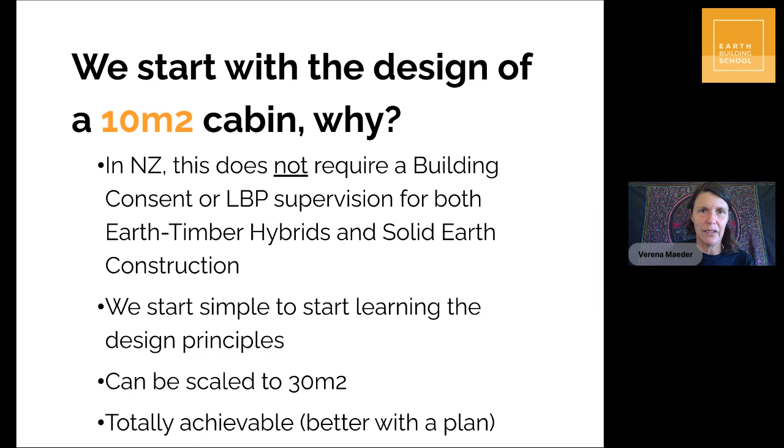So in terms of designing, definitely start small, try and keep up this week. You'll see there is a lot of moving parts even with a very small building, and then we can talk about what has to happen for you to either go into making this building a reality, like actually building it, or scaling the design into something bigger.

So just a couple of words still on the legal side of things - wherever you are, you need to make this investigation.

What requires a building consent or what is exempt. Exempt means it doesn't require a building consent. You decide what the situation is for you, and every region, every country will have different regulations. In New Zealand, we have this exempt building work.

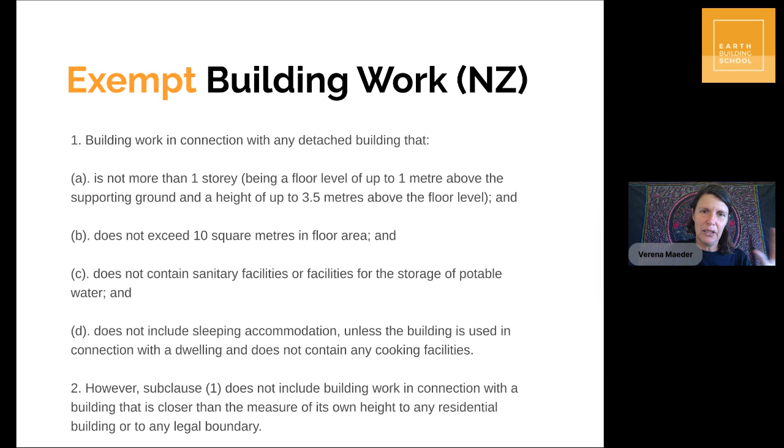You can Google that and read up on it. I'm just putting the wording on screen, I'm not going to go through it. There's actually a new publication that's just come out about tiny houses in particular, and I'll put a link to that in the comments to the live stream after we finish. So that's just come out, or I've just been made aware of it a couple of days ago. This is the legal side of things, what is exempt, what requires a building consent, and that will allow you to make an informed decision.

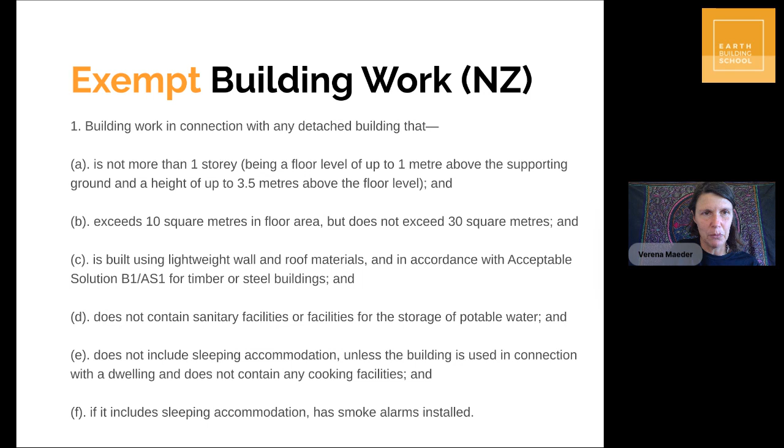I'm not going to tell you what you need to do, because that's up to you. At the moment we're just talking about design, and as I said, it's important that you design to standards. Since we're looking at earthen tiny houses, I'd like to introduce you to the New Zealand Earth Building Standards. It's a set of 3 standards, and 2 are relevant for self-builders. For the design challenge, we're looking at the top one: NZS 4299, Earth Buildings Not Requiring Specific Engineering Design.

These standards are designed to support owner-builders, self-builders, in designing full homes, but we'll apply the principles of this to a tiny house. The standards have been around since 1998 and have recently been revised. The older version is free for download, which is really great. So wherever you are, but also if you're overseas, I'd really encourage you to download this and have a look at it, because it's very common sense and very practical. It really, step by step, lays out all the things you need to go through to design an earthen building.

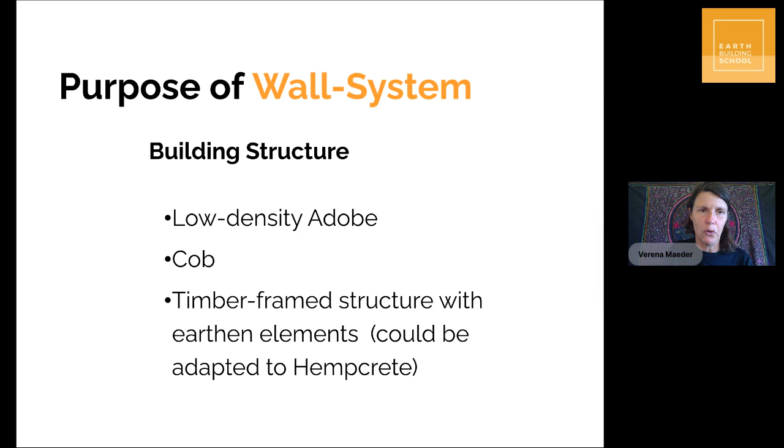For the solid earth walls, based on taking the temperature in the group - when you're joining the Earth Building School Facebook group at the start, you're telling me your interest - and based on those answers, there's a lot of interest in Cob. So I will be presenting on Cob, and I will also be presenting on the Adobe brick technique, particularly the low density Adobe brick, which is an innovation here in New Zealand that we've been involved in since 2008. So I really want to present that option to you.

Just to give you a bigger overview, when we're talking about earthen buildings, there are so many different techniques worldwide - so many historic earth building traditions, and according to different places, the climatic conditions, the craftsmanship, the resources, different techniques have developed. We can roughly divide them into 3 sections: monolithic solid earth walls, meaning in one piece; brickwork, where you have smaller units put together with mortar; or structures that are a supported earth, supported by a structure.

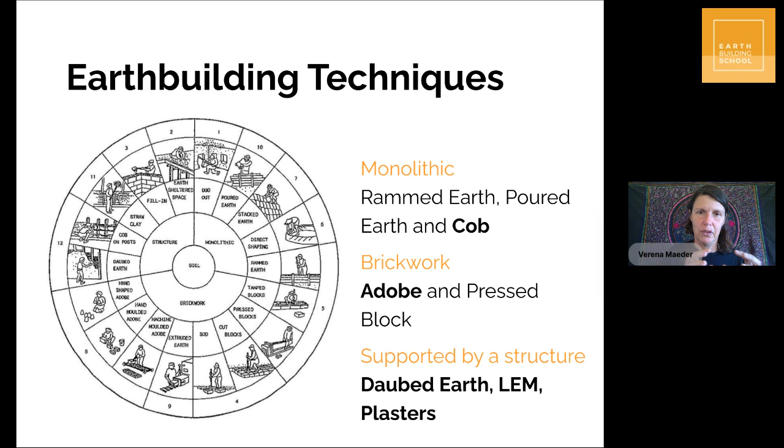Mostly this structure would be timber, or in some places bamboo. For the sake of this training, for the monolithic walls I have picked Cob. For the brickwork I have picked Adobe. And for the timber earth hybrids, where you have a support structure made mainly out of timber, we're going to touch on all of the options, because there are different ways that you can incorporate earthen mixes into timber buildings.

So today, fundamentally, you're going to choose: do I want to do a solid earth wall construction design, or do I want to design a timber earth hybrid? There are different things you can think about when making this choice. Sometimes people lean towards a technique for whatever reason, but when someone comes to me and asks which technique they should choose, the first question I ask is: where do you live? What is your local climate? What are your thermal performance requirements for your building?

That's important in terms of comfort. When we're looking at thermal performance of earthen buildings - or any building for that matter - there's always this balancing of thermal mass on one hand and insulation on the other hand. This is actually something I'm still surprised how many people don't really understand the difference between thermal mass and insulation. It's getting more clear to many people, but I just want to explain it.

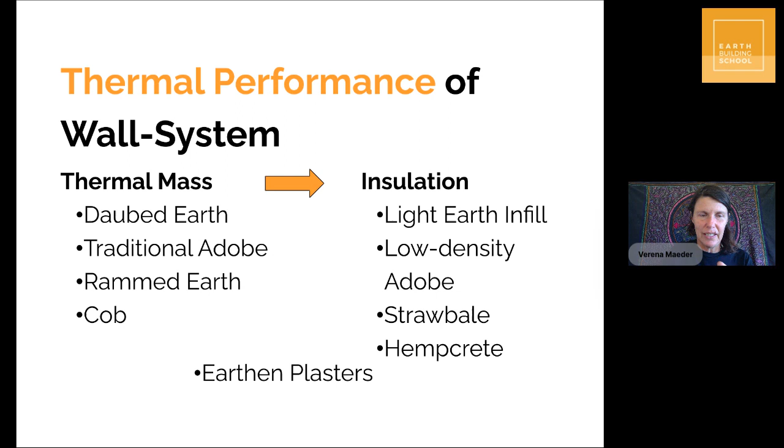So just putting this here for you to start thinking, depending on your location, what do you need? And ideally, you have a combination of both, especially in temperate climates.

So you have thermal gain, sunshine. Ideally, you design the building according to passive solar principles so that you can shade out high standing summer sun, but let in lower sun angles in winter. The solar gain heats up the thermal mass, the earthen floor or your earthen wall, and then at night that gently radiates back into your room.

And then you see the orange thing, that is the insulation that goes all the way around the entire building. So it's definitely important to have insulation in your roof. You might want to additionally insulate the cold side of the building, or have a structure with insulation in the form of lighter mixes or insulation material, and that just wraps the whole building and keeps the heat in. So you see how these two components, the thermal mass and the insulation, work hand in hand.

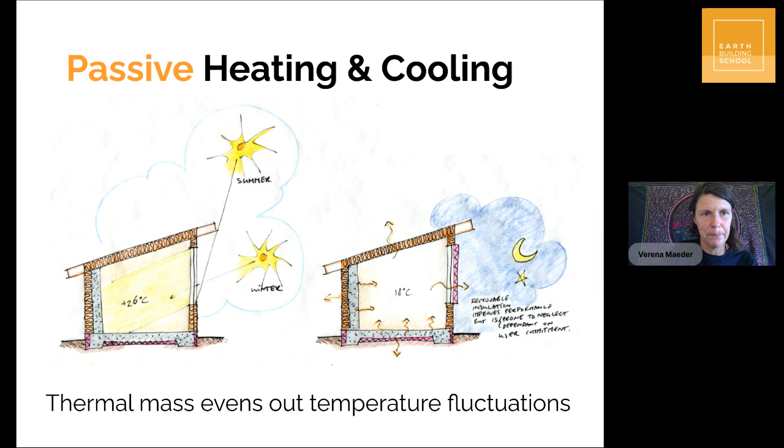So moving on, another lens through which you could make this decision is if you're actually going to build the building, not just doing this as a design exercise. I would really encourage you to think along the lines of your human resources and how the construction will happen for you.

Just give me a moment, I need to have a little cough.

So the different techniques definitely have different requirements in terms of skill. On one end of the spectrum, you have the Adobe brick and Cob techniques, which are very simple to learn. You can even learn this online—we teach this online, and it's quite remarkable how we can upskill people even over distance. You can attend a workshop, or get upskilled relatively easily, and these techniques also lend themselves to community efforts. Often there are working bees or longer workshops where people come together and actually build a whole small building, and that is very possible with simple techniques like Adobe and Cob.

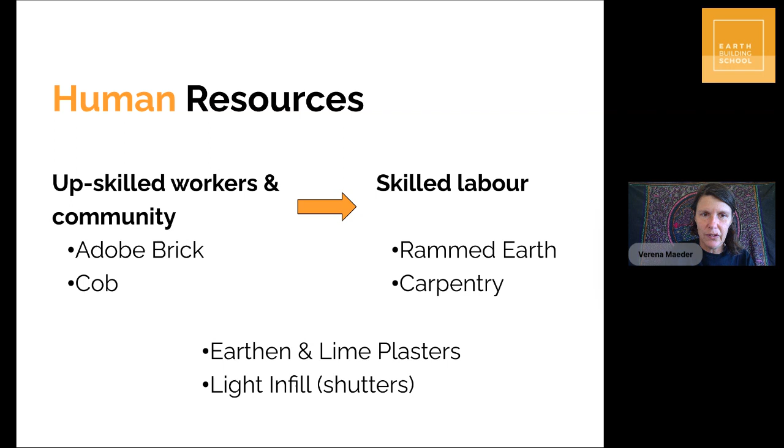Working with timber is absolutely wonderful, but you need more tools, and you definitely need to have or develop the skills. In between, along the spectrum, there's other things that flow into your building, like wall finishes, where you'll need a bit more skill than just placing cob. Plastering typically falls into that. If you decide to build a timber earth hybrid, you have the timber structure, and then you have shutters and so forth, so there's definitely a little bit more skilled work involved.

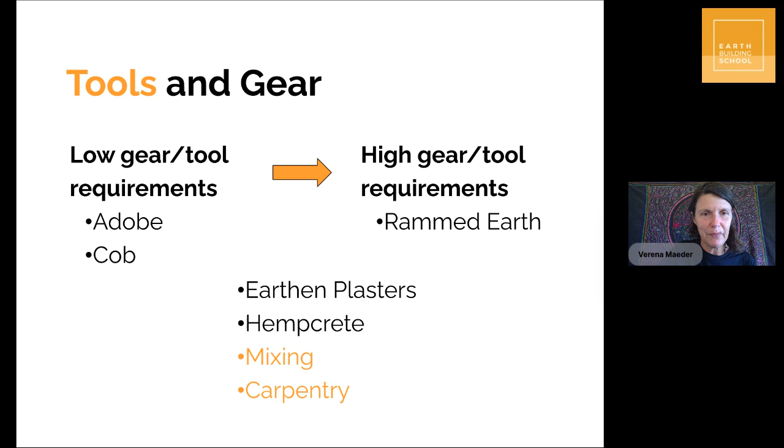Just tagging on to that is also the gear and tool requirements. Adobe and cob often can be done with hand tools, you don't need that many tools for that. At the higher end is like rammed earth - again, you need pneumatic rammers, and you're using tools to put the very heavy shuttering together. Along that spectrum, depending on what you're doing, you might require things like mixers, some carpentry tools, some plastering tools, and so forth. So depending on how much you want to invest in tools and gear, if you're going to build this building you're designing, this is something you have to think about.

Another way of looking at the choice between techniques is understanding how much moisture you're introducing into a building when you're building. In earth building, there's wet techniques and dry techniques. By wet techniques, I mean you're making an earthen mix - it can be different techniques, so you can have cob, or a light earth infill, even earthen plasters. You're making a mix that contains quite a lot of water, and you're placing it straight into your building, and then you have to wait for that water to evaporate and for the mix to dry out.

That's wet techniques. On the other hand, you have the dry techniques, where you basically produce an earth building material away from the building. It dries out, and then you're placing it into the building dry, or with minimal water. There's a little bit of moisture in the mortar, and in rammed earth there's a little bit of moisture, but overall you're not introducing that much water into your building, so the whole thing dries out much faster.

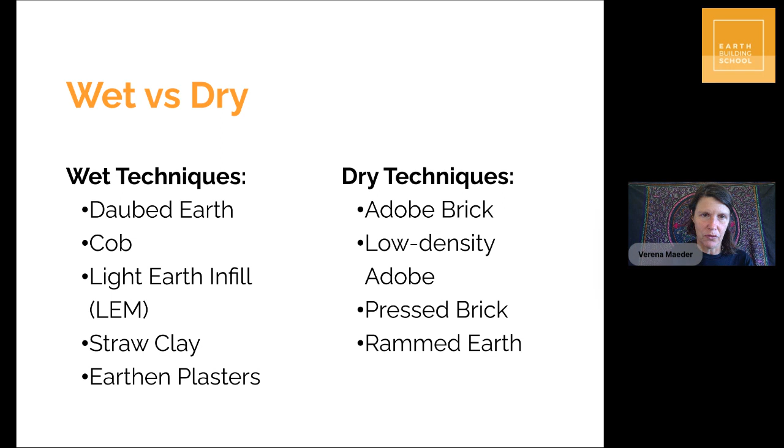And that affects the logistics of how your building project flows, how soon you can move in, and so forth. It affects, depending on the technique you choose, the drying times of your building. So when you're looking at things like Adobe blocks,

Hempcrete, daub, and so forth, even things like straw bales - straw bales are installed dry, but then they're plastered, so there's a little bit of drying time in the plaster. These techniques typically don't take that long to dry out, so up to 2 months. If you're going into wet techniques like cob or light earth infill in your timber earth hybrids, you're looking at much longer drying times - it can be upwards from 2 months all the way up to 5 months for cob, depending on the wall's thickness.

So you need to take this into consideration when you think about the logistics of the building, and when you start building, that you're not building a building that has to dry out over 5 months in autumn. The timing really affects things, so ideally you want the building to be drying out in summer. It's important to allow the building to dry out in a timely fashion, because otherwise you might have issues such as mold formation, or it's just not so nice to be in a damp building, and you certainly shouldn't move in before it's dried out. You can't do the wall finishing before it's dried out, and so forth.

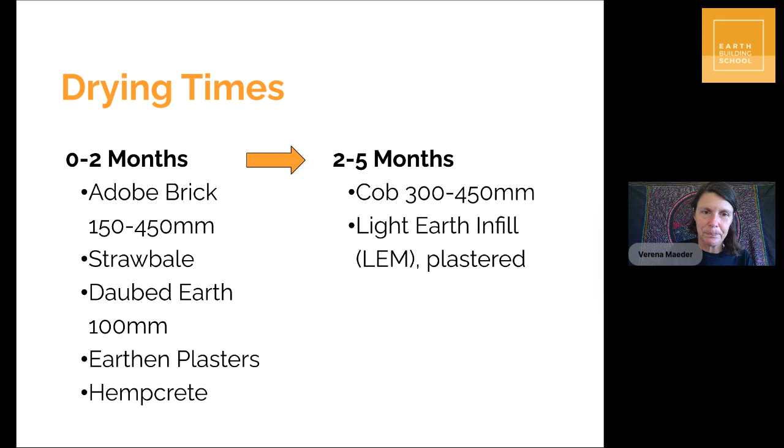So that's the drying times. And then you could think about other cost considerations, the owner, if this is something that's important to you. And when we advertised the tiny home challenge, we were definitely talking about affordable buildings and owner builder contribution to that. We're very passionate about empowering people to be able to do this.

The owner builder effort can reduce the cost of the building considerably, but depending on the size of the building, your wall system is not the thing that costs the most. So for tiny homes, it definitely makes a big difference if you build yourself, and depending on the materials you use, if you can source secondhand materials, or mill some of your own timber and so forth, that will all reduce costs.

For bigger buildings, you have to do a proper cost analysis of everything, because we found that the type of wall system you choose, you can't say this wall system is cheaper than this wall system. It really depends on a few different factors.

So on day 5, we have dedicated the whole training towards quantity surveying and cost analysis, because it's important, and it might steer you away from a certain technique that you might have wanted to choose because you like the sound of it, and then when you're crunching the numbers, you might not want to go down that path. So it's good to compare different types of wall systems, do the math on it, and think about your resources, both money-wise, people, materials, and so forth. You might want to go through this design process with both wall systems.

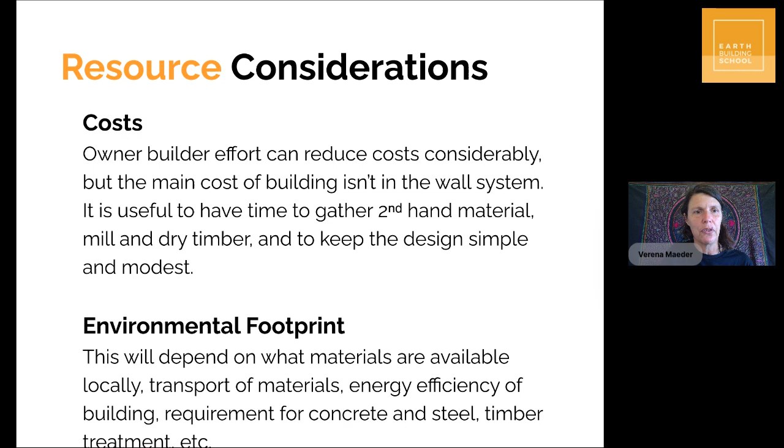And last but not least, the environmental footprint of the building does matter, especially in this day and age. So I really encourage you to see what is locally available, to reduce transport of materials, to really look at embodied energies. Sometimes there is requirement for steel and concrete and foundations, depending on where you are. Look at that and weigh it up with other materials. Look at things like timber treatments, and try to choose materials that are non-toxic, both for your own health and for the health of the environment. So these are all things you could take into consideration.

And I'm just going to leave this, a couple of words about costs. So the timber, and this is statistics based on New Zealand, our own government has put these figures out, the timber has gone up considerably in cost. So unless you can source local timber and get it milled locally, which is beautiful, you might really want to look at the costs and how these have increased.

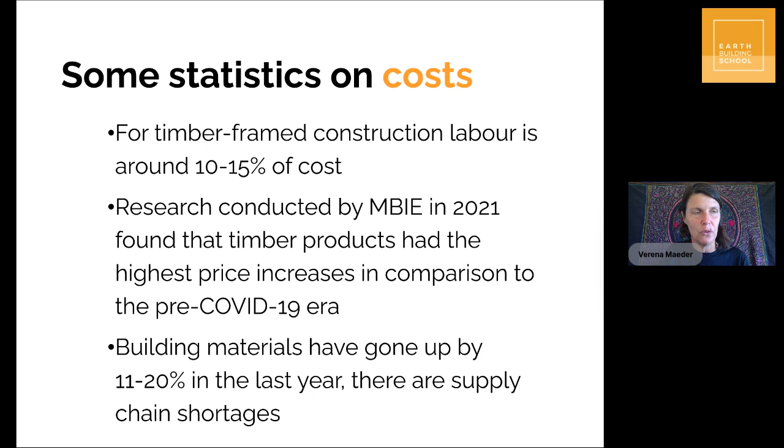If you're leaning towards a timber earth structure, it's not just for the structure, it's also for the cladding and all those things, so it can add up. The costs have gone up, but there's also a bit of a supply chain problem sometimes, so it's hard to get hold of the timber and it can hold you up. In times like these, I think the earthen materials and solid earth wall systems could really shine and make you independent of that timber supply chain, unless you have a local supply, which many people, especially if you have time to look around, that's a beautiful thing, to look for local timber.

So now I'm just going to talk you through the different techniques, starting with the solid earth wall and the Adobe brick technique. I'm mainly talking about low density Adobe, which is a lighter mud brick, still able to support the weight of the roof, but this can be adjusted to any type of Adobe brick.

If you're in a hot and dry climate, you would definitely still use a traditional Adobe brick. If you're in a temperate climate, you would go to a low density Adobe brick. It is load bearing, it's strong, and you can modify how much insulation and thermal mass the brick has depending on the mix. You can use a very wide range of soils if you're making your own bricks, so it's suitable for lots of different places and soil types. It's very easy to learn, covered by the New Zealand Earth Building Standards, and it's a very simple technique.

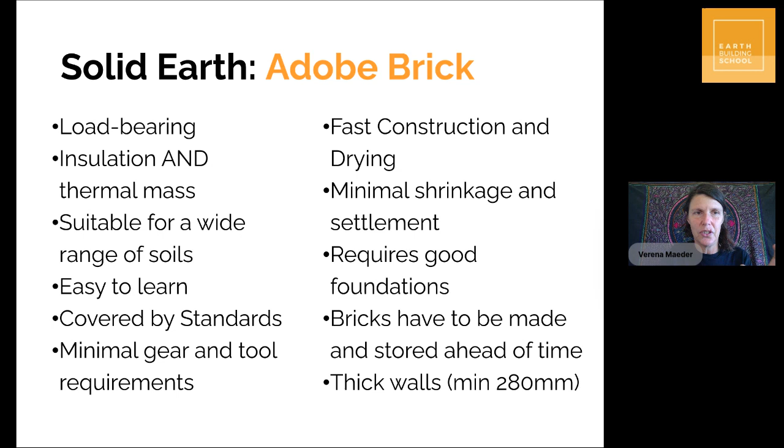The timeline for Adobe - the logistics of that is you're making a mix, making bricks, the bricks dry out, you stack them away. At the same time, you can do your design. Then when you're ready to build, it's fast - you're laying the bricks and they dry out fast, and the finish can be done later on. You're laying up your walls, and then very soon after you're putting up the roof. So it's very fast and efficient.

For a small building, the whole process can be done over the warm season. For a bigger building, it would typically be split up over 2 seasons, 2 warm seasons.

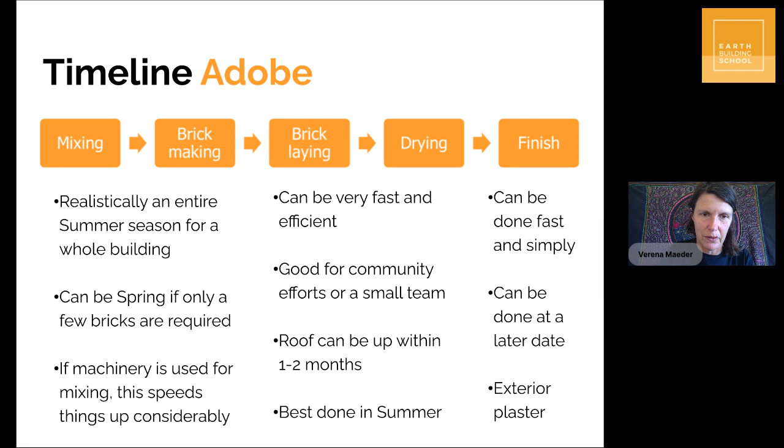Comparing this to Cob - that's also a solid earth wall, the same thickness, minimum 280 millimeter thick walls. It also requires good foundations because it's definitely heavier than the mud brick. Also load bearing - sometimes people put up a post and beam structure and put the roof up first, then cob around the post so they can work undercover, because the working times are longer. With the mud brick, you can theoretically have a good window of weather, 2 weeks, lay the walls, put up the roof. With cob, you're looking at months.

So some people choose a post and beam structure. Also, a wide range of soils is useful. What you're doing is making a cob mix - introducing straw and sometimes aggregates like coarse sand or crushed rock. Making the mixes is a bit more labor intensive, and you're also often having to add slightly more expensive components depending on what you have available locally. It's easy to learn, and it's also covered by the standard.

Because it's installed wet into the building, you need to allow for shrinkage and settlement. That's something you think about in the design, and also when developing the mixes - you have to control shrinkage with the right mixing, test for shrinkage, and let everything shrink and do its thing before you put, for example, windows in, because if the wall shrinks down onto the window, it might not be so good.

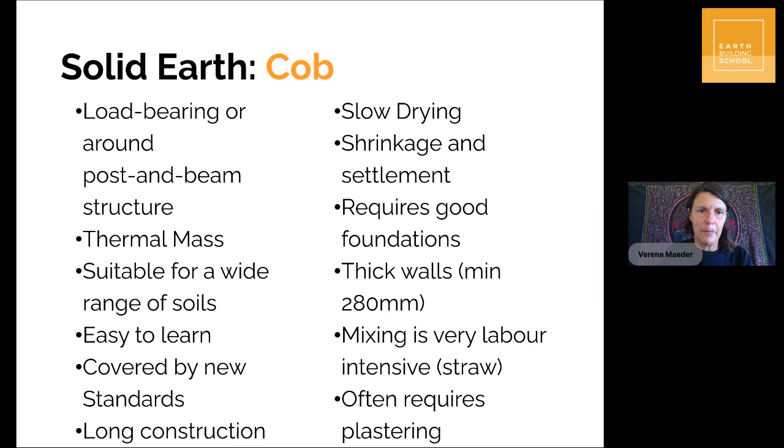So there's similarities to the Adobe block, and then there's distinct differences, especially in the logistics of the timeline and the required time during construction.

So just to show you that, you're mixing the cob mix, and then freeform placing the cob in the wall. You're typically going up layer by layer, and you can only go in layers as high as they can self-support, before they start slumping. It's a little bit like when we were in the pottery class, where you make the sausages and build up with the little sausages, just on a big scale.

Between the lifts - so the little sausages are called lifts in cob construction - you have a little bit of waiting time for that lift to firm up enough to then support the next lift. So definitely the building process is much slower than laying mud bricks.

And then you build all the walls. Sometimes there's a little bit of trimming depending on how tidy you've laid the walls. Some people use shutters that sort of self-trim. And then there's quite a substantial drying time, which can extend over months. And in that time, the walls have to be covered.

There's either a roof structure that is required, which you can't totally install before the wall is dry and strong, or you cover the walls with tarpaulins or plastic till they're dried and protect them from the rain. And then later on, you also do the plastering and finishing. So it's much more drawn out.

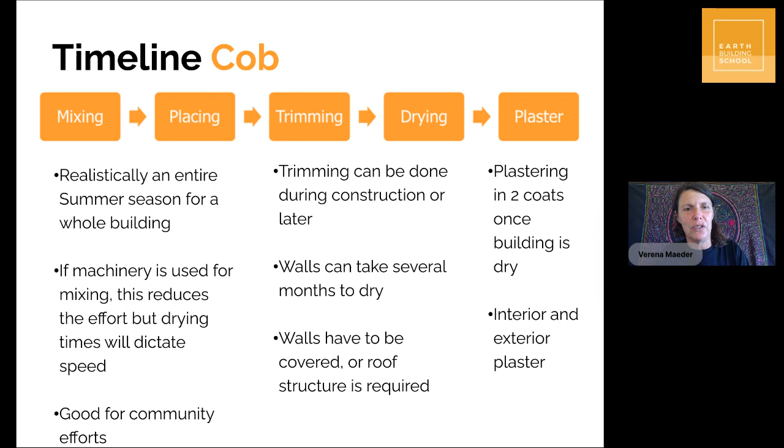So just the logistics are different. And to show you some images of this, this is a mud brick place that we supported some students in building, and it's a 30 square meter building. They made the bricks themselves. And when they were ready to lay, I think this building took them 3 days to lay all the bricks for the walls, and then they put up the roof, and they also finished the exterior with a lime plaster, interior with an earthen rubbed finish, and they started laying an earthen tile floor.

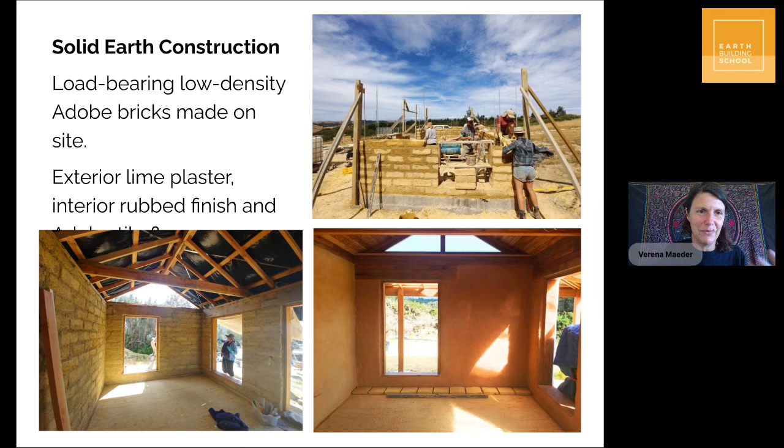So all the materials pretty much of the interior were just earth, installed in different techniques. It was very neat.

Cool. So I'm now pivoting to the other type. So it's a timber earth hybrid construction. What I mean is there's a timber structure and there's earthen components that are incorporated into the timber structure.

One of these earthen components could be daubed earth. So wattle and daub is a technique where you have a lattice work of some sort. You're applying an earthen panel, usually to the inside of your building. It can be on both sides if you can protect them from the elements on the outside, but it has a certain weight and it needs a good support structure. So something is attached to your timber frame that can take the weight. There could be horizontal battens or trellis or bamboo or whatever. And then you're applying the clay over that.

And it's heavy, so it's got good thermal mass, but it's a thin panel, so it doesn't have good insulation at all. It has some thermal mass properties, so it's useful as something that gets retrofitted into a building, but you definitely still need insulation. Because it's not so thick, it dries out fast. It's useful for interior walls.

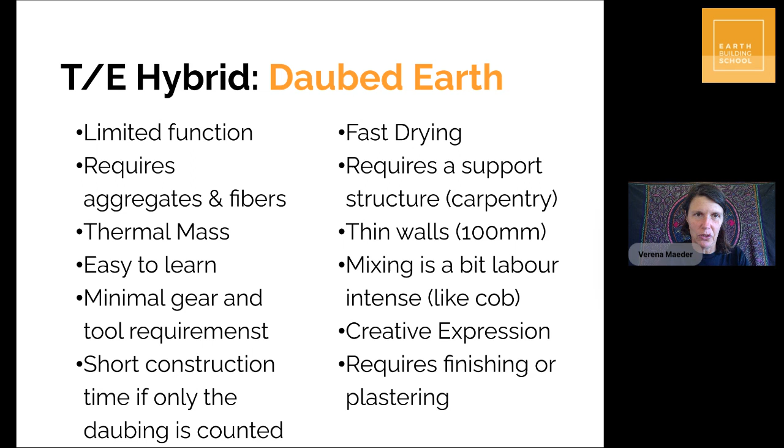And it's also a really nice technique if you want to have creative expression or sculptural elements in the building. So in a tiny home, it definitely could look good. You can do little recesses or even inbuilt shelving and so forth. And you can bring that sculptural quality of the cob, because it's basically a cob mix. So it's an earth that has got a fiber in it, and you can play with it. So you can bring that into a timber frame building. So the daubed earth is a really good option if you're going for a timber building and you want an earthen aspect to that.

A very refined example is the traditional Japanese walls. They are typically made from wattle and daub. So they build these walls up in different thicknesses. The interior walls are often thin, and they go over a lattice work of bamboo and then finish it with very fine, beautiful earthen plasters. So that's a nice example of wattle and daub.

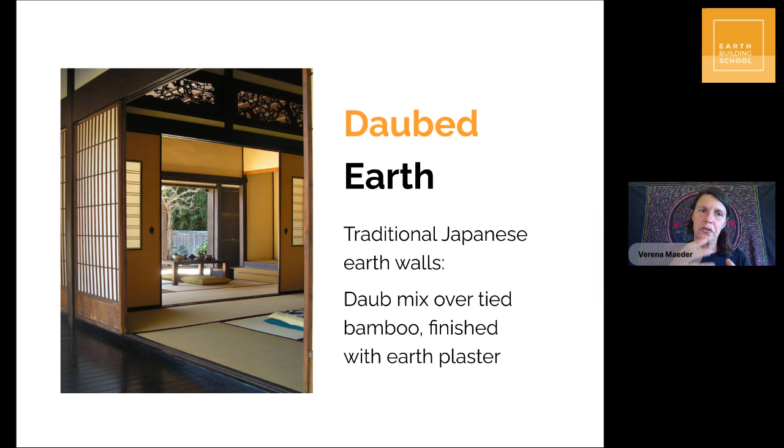It also exists in the Americas, in places where walls are often built around bamboo. The two materials go together really well.

You also don't need very thick walls. In places where you need insulation, if you've got a timber frame structure and you're bringing in earth as infill insulation, you want a very light and fluffy mix. Light earth infill mixes can be made from different lighter additives to the clay, such as fibers like straw or rice husks, wood shavings, wood chip, sawdust, or even mineral light aggregates like pumice.

The way light earth infill works is you have a timber structure and then shuttering. A shutter is boards attached to either side that you fill between, holding the mix in place while you're placing it. Later you take the shutters off and the wall stays in place. So for light earth infill, you definitely need shutters.

You're filling the light earth mix between timber elements. You need to detail the shuttering properly for the light earth infill specifically, and the standard shows you that. I can also show you photos or diagrams of how that's done. For the design process it doesn't matter so much - this is construction. But what you need to understand is that when you're going for a timber earth hybrid with light earth infill, the light earth infill pretty much only fulfills the function of insulation.

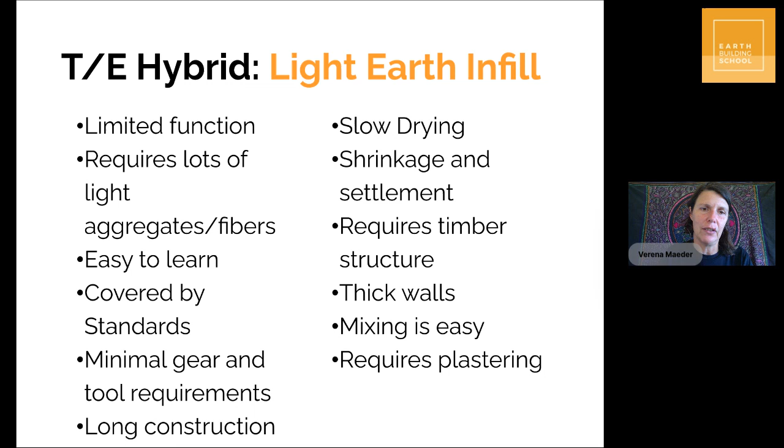Typically timber earth hybrids are a little bit more complex because you have a timber structure, then whatever you choose - a light earth infill or a wattle and daub panel - something. On the exterior you still need cladding, and on the interior you still need to finish the surface of the wall in one way or another, usually applying an earthen plaster. So there's a lot of material changes, multiple layers, and drying times between those layers, so the detailing and thinking around all of that is a little bit more complicated.

Just to show you again, to compare it so you can wrap your head around it: when you do an infill with plaster, you have the timber structure erected first, including the roof. Then you're infilling, which is equivalent to putting in insulation. This has to dry out, sometimes for several months, so it's really important to do this at the right time of year and to ventilate the building because you want it to dry out.

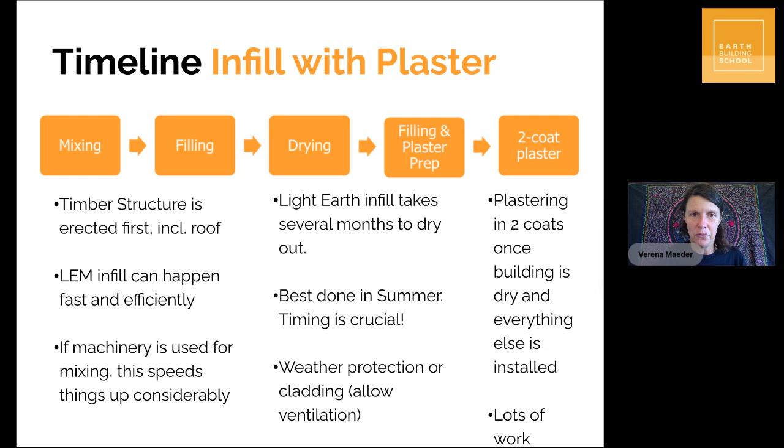And then later you're plastering. So this can be a lot of work. Again, people say the infilling goes fast - yes it goes fast, but it's only one part of the building process, and it's actually just the equivalent of filling in insulation. So keep that in mind in terms of the timeline - there's lots of other jobs that have to be done.

To show you this on a building, again that's a 30 square meter building we were involved in. The people here milled some macrocarpa on site, so they had all this beautiful timber, and a lot of sawdust and wood shavings as waste from the milling. We made the light earth mix from the wood shavings and sawdust and earth that was also dug on site. So all the materials of this building, apart from the sheet iron for the roof and the foundation, came from within 50 meters of the building, which was amazing.

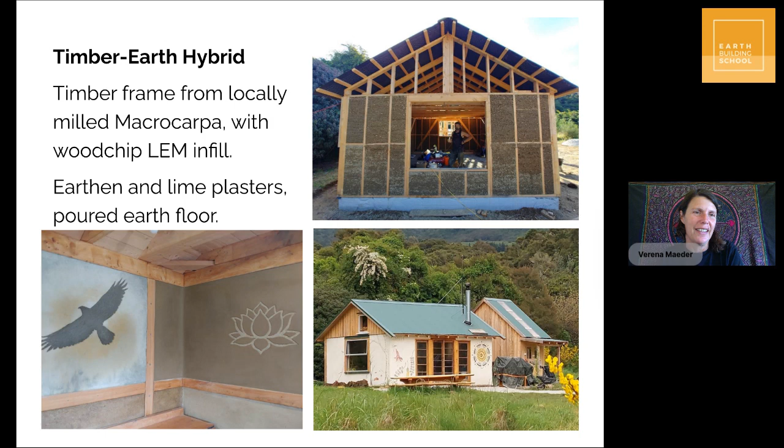The exterior we then finished with lime plasters, and we did a plaster artistry workshop on it, which was a lot of fun - that's why you see the colorful artistic details on the outside. On the inside we did the same with earth, doing plaster artistry with earthen plasters, and different students did different wonderful things in the panels inside. So this just gives you some ideas of how the timber earth hybrid could look.

Another initiative that is a timber earth hybrid is the Posi, developed by a local designer here in Whakatu Nelson called Mark Fielding. He was very inspired by the garbage warrior idea, and wanted to build these little cabins out of totally reclaimed materials, mainly shipping pallets for the structure.

He actually used waste styrofoam sheeting that was from wrapping appliances. So he went and got styrofoam out of the waste stream for insulation, which, I like the idea of recycling, but it wasn't a very pleasant material to work with or for the interior climate of the building. He then used a recycled carpet as the interior lining and a clay paint over the recycled carpet, and reclaimed materials for cladding. So he calls it the posi.

He has an ebook up online where he shows the process, because he actually developed this as a panel system, and the actual pallet panels were stress tested. So I think he even got a building consent with this system, and he scaled the system up for bigger buildings.

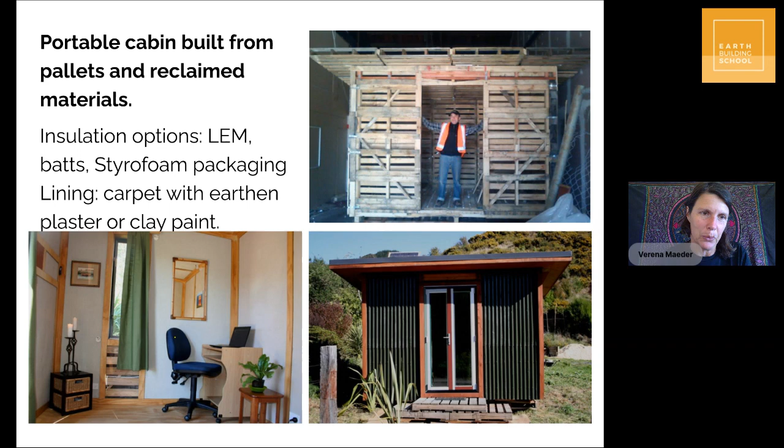We inherited a part building from him, a little posi, and didn't like the styrofoam at all. So we packed the pallets with light earth infill and then finished inside with different things, either earthen plasters or the carpet with earthen paint or a wattle and daub panel. And it works wonderfully. A very nice little building with the earthen materials rather than the styrofoam.

So at our place, we have 3 different small, tiny buildings in different techniques. We have 2 timber earth hybrids, and we have 1 solid mud brick tiny house, and soon we'll have a 30 square meter bigger building that is going to be our teaching space, our little tiny campus, which we also built from mud bricks.

So we're comparing the 2 wall systems, and we're definitely leaning a little bit towards the mud brick, but I'm really trying not to skew you in any way, and just present the rationales that we've gathered over the years to let you make a decision.

And the look is important too. So some people actually really like the solid earth aesthetic of the solid walls. Some people like claddings. I would suggest that you choose the look to feed your soul, but the look is not the only thing that determines which technique you're using, because the main thing really is the resources and your location. And there's definitely a scale of cool in how the different techniques are perceived.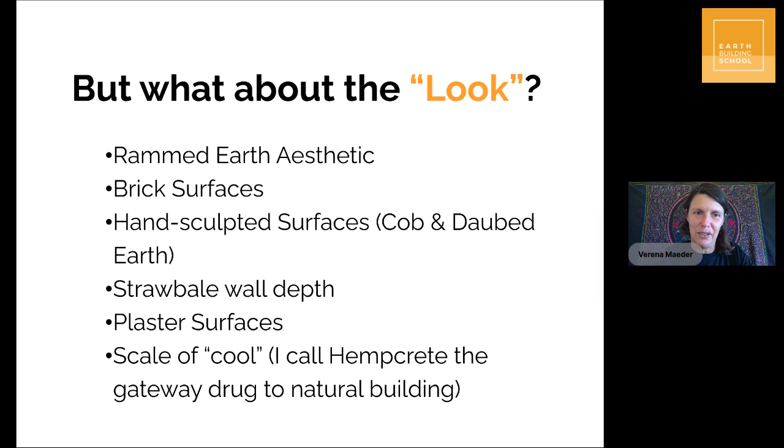So putting it out there, the look is definitely important. If you really feel passionate about something, it's great, because the passion fuels you to achieve your dreams. Let's discuss things in the group if you're still questioning which technique you want to choose, and I'm very happy to have these conversations.

I'm just going to show you a couple of other things from our own little buildings, so things you can do. This is the timber earth hybrid construction - timber frame, light earth infill, earthen plaster - and we have a detail where around the bed we have reclaimed old wood. I really like the material changes in the timber earth hybrids. You can do really beautiful things.

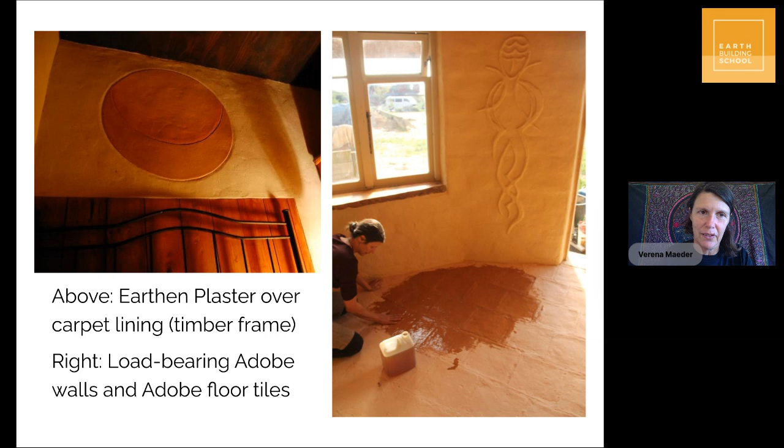And on the other hand, this is the mud brick cabin with the Adobe tile floor. So it's very much that brick aesthetic, very solid feel, very nice thermal performance in this building, and quiet. They're just different, and it's nice to be able to compare them.

And another, just before we wrap it up - really important when you're thinking about building or designing and then building is to build safe buildings. So both the solid earth construction and the timber earth hybrids, they have certain rules you have to follow for them to be safe. And what I mean by safe is the forces of nature on the building. So in places like Aotearoa, New Zealand, where earthquakes really affect buildings, the heavier the building, the more the damage to life could be.

So that definitely needs to be taken seriously. Water is another one. Water can affect any kind of building. Typically, people think earthen buildings are more prone to water damage, and sure, you don't want them to be flooded and inundated, you don't want rising damp, water runoff, and so forth. But you don't want that on any building. Especially your timber earth hybrids - with earth, if it gets very wet, eventually it disintegrates and it's not a good look.

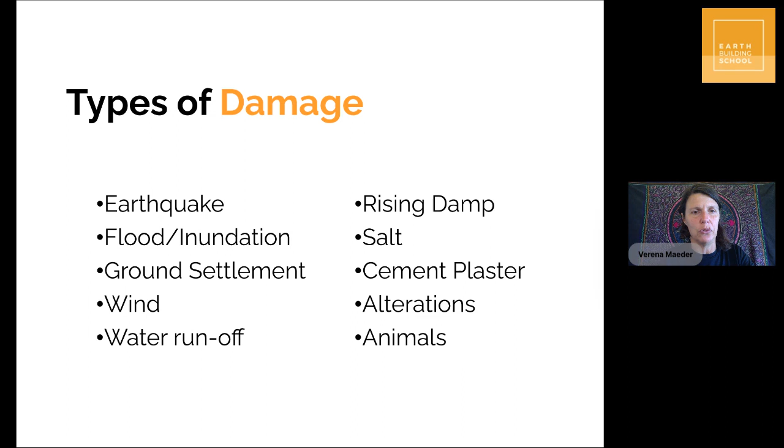And wind forces are a really big one wherever you are on the planet. This is only going to become more with global climate change. So really making sure that your structure is strong enough to stand up to wind, that your bracing, the stiffness of the building is up to scratch, and that your roof doesn't lift off. We'll look at that in more detail on day 3 when we look at structure. So taking this seriously is important to us.

There's a lot of examples of natural buildings, especially small, experimental buildings or buildings without consent that don't comply, and they're not built in a safe way. And it is really important to us as a school to promote good building practices, regardless of whether you're applying for building consents or not.

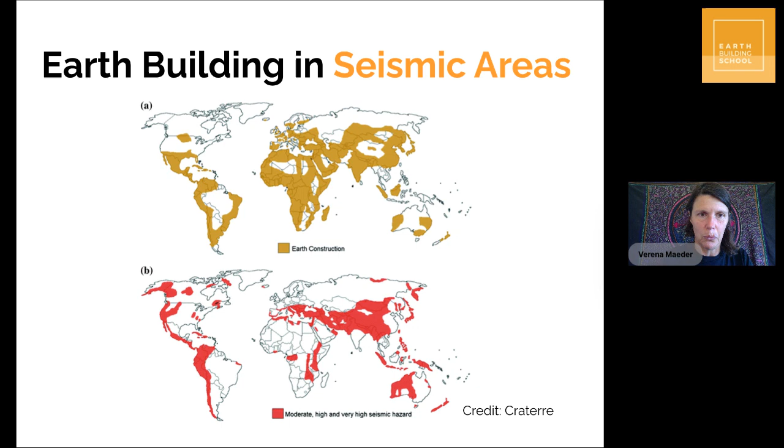And just to give you an idea, we're talking about seismic areas. That's areas with earthquake, red here, and you see areas where there's earth building. So there's a lot of overlap, and earth building gets a bad rap in earthquakes because they collapse, and New Zealand is at the forefront of earthquake safe design with the earth building standards, and that's why we're internationally cited with these earth building standards, because we have a very good system that is practical and safe.

So really useful. We have students from many different countries that have been using these standards to design their own buildings, and in some places even convince their local authorities about the safety of the buildings, and to educate and get earth building updated into more modern requirements for buildings. So really encouraging you to check these out.

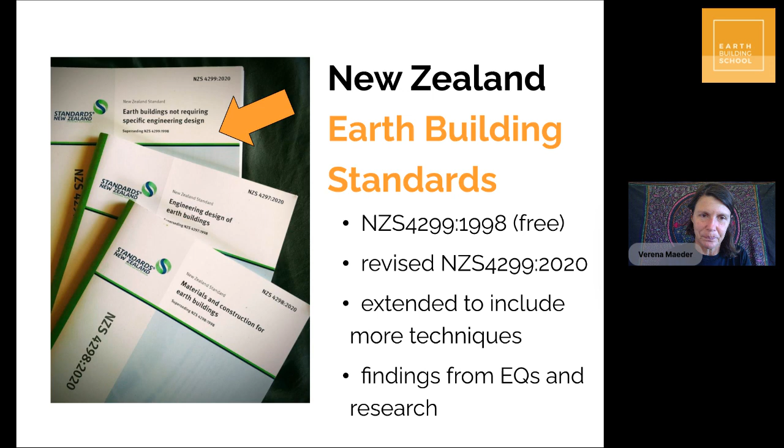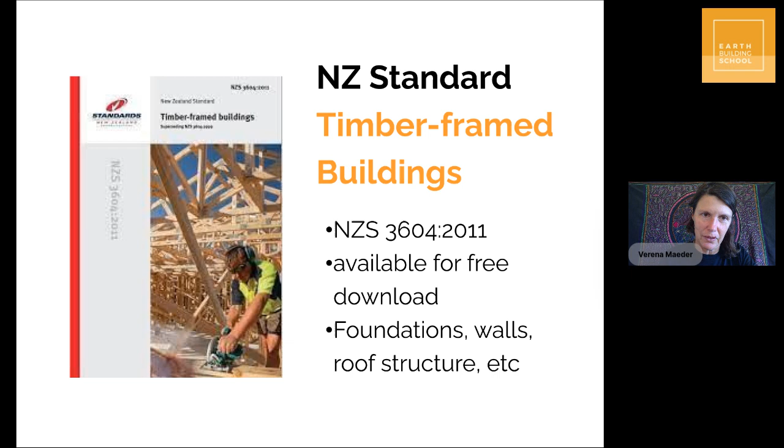And we'll also need the timber framed building standard for the roof structure at least, or if you're going into a timber earth hybrid for the walls. So get both for the sake of the design challenge. Download them so that you can have a look at them.

And that brings us to the end of today's training. I would invite you into some assignments if you want to take part. Some of you will just consume this for information. If you're starting to design and you want to be part of the design challenge, like in real time, today...

I would suggest, based on what you've just heard, what you've learned, choose a wall system for your tiny house design. Make a choice. If you don't know what to choose, just choose something, because you can always repeat the process for the other type and then compare notes. Having the restraint will actually focus you, and it will just make this design process possible. So choose something today. Don't overthink it if it's complicated.

Ask questions, and then share in the Facebook group or on the page what you've chosen and maybe why, if you want to share that.